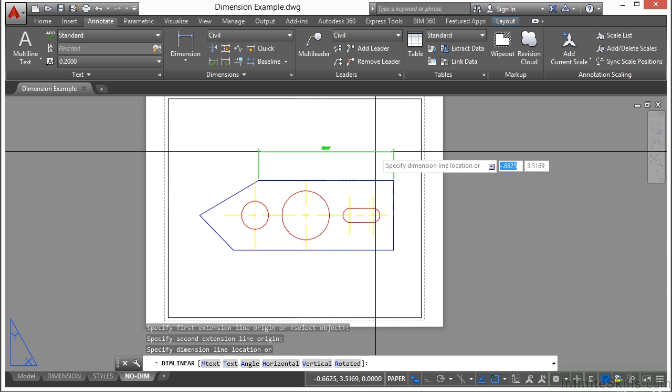So right now with it set to 2, if I draw a dimension here, any type of dimension, and then I go to select it, you see it's a dimension object. If I open up my properties palette and I select it, it tells me it's a rotated dimension. That's the type of dimension it is.

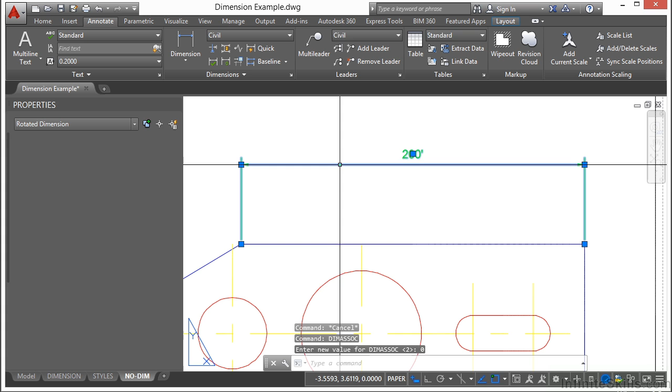Now, if I go to my DIMASSOC value and I turn it to 0, of course, this dimension will stay the same. It was already drawn in. But if I create a new dimension, I get a lot more options. This is the very old setting for dimensions that we used to use before associative dimensions. But it's still here. It's a legacy command. And when you go to use it, it asks for a lot more information, like the value.

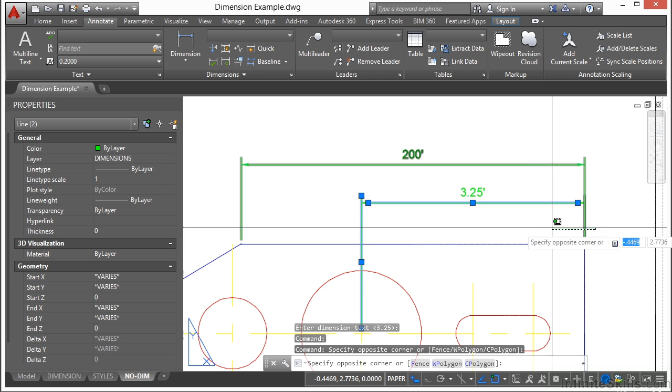Once you type it in, you can see here, this is not a dimension. This is just a series of lines. It's also a text object. And we have an arrowhead here that is really just a solid. So I can't easily change or edit it like I can here. You don't want to use this unless there's something absolutely strange about your dimension that you can't get to work right. So that's what that setting does.

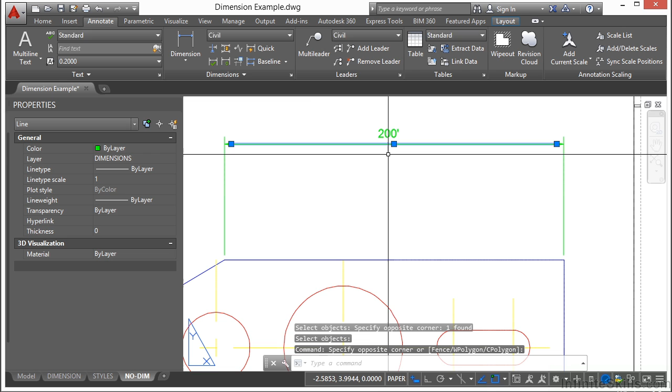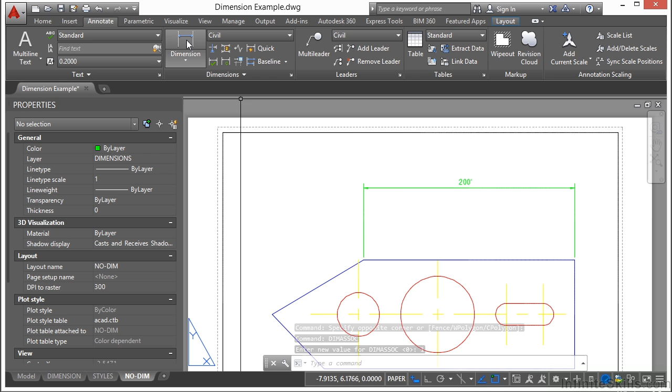Now, if you explode a dimension, that's kind of the same result. It just turns it into a bunch of lines, text, and solids. Now, there's a difference between setting 1 and setting 2. A lot of times you'll find older files set to number 1. Number 1 turns them back into a dimension object. So now when I create this dimension and select it, it's a dimension object, same as if I select the old one. I'm going to erase these to get them out of the way.

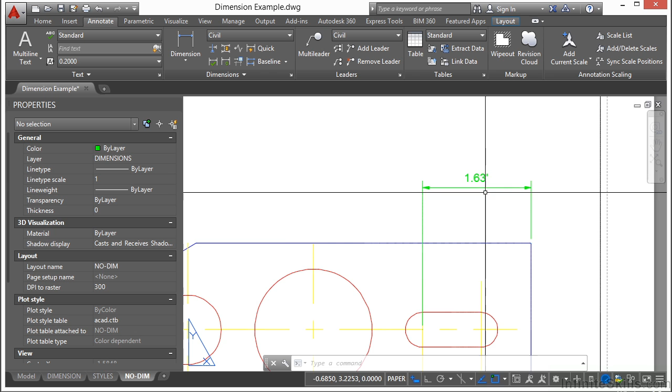But this is a setting where you need to manually set your scale. As you can see here, this dimension is 1.63 units. If I set my DIMASSOC setting to 2 and dimension the exact same spot, you'll see I'm getting a different value. Setting 2 associates your dimension insert points to the object in model space that you pick while you're dimensioning in paper space. Setting 1 doesn't do that. It takes the absolute true length of what you're actually measuring in whatever space you're in, be it model or paper space.

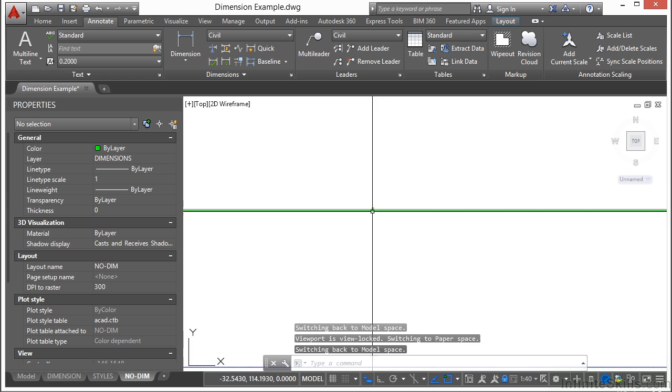So if I double click inside this viewport to activate it, change my DIMASSOC setting to 1, and dimension this, first of all, my dimension is not to scale, so it's not showing up right. But you'll see as I zoom in, I get the proper length, 65 feet. Same as in here. Setting 2 allows you to work in paper space. It measures the true distance involved, not the viewport scaling. That means you can make one dimension style regardless of the scales used.

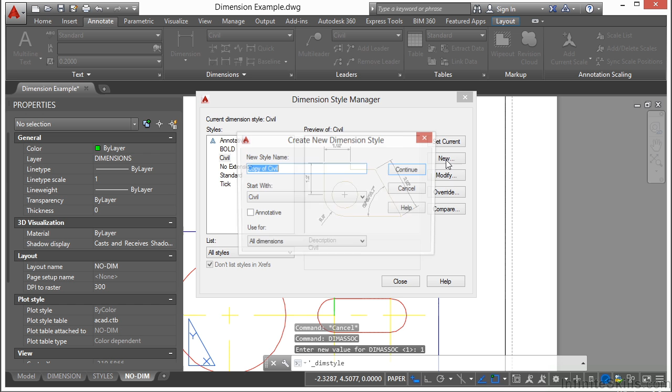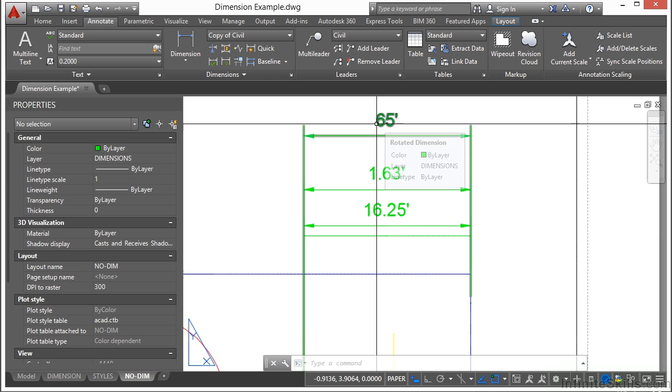So if I'm using the DIMASSOC setting of 1, in order for this to scale properly, I have to go into my Style Manager and set up the scale of my drawing right here. So if I change this, let's say to a scale factor of 10, set that one current, and make a dimension here, it scales up the value it's measuring by a factor of 10. So you can see here, this is 1 to 1, this is 1 to 10, and this is a true value based on the viewport scale.

Setting 2 is easier because if I have multiple viewports at different scales, which you will often do, especially on architectural or mechanical drawings, then I don't have to set that up. I can just go with it. Also, the setting of 2 works everywhere. It works in paper space and model space. Some people prefer to dimension in model space, some in paper space, and sometimes you may need to do both. I don't suggest that, but sometimes that happens. Setting it to 2 means there's less work for you to do.

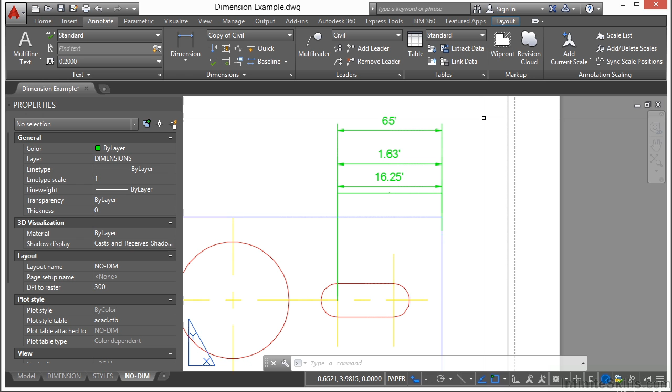The settings of 0 and 1 are legacy settings that are still there because Autodesk never gets rid of old commands or system variables. They bury them deep in there, but they keep them in, and that's the legacy thing you might come across from time to time, but just set it to 2 and everything will work fine. So if you get a drawing from somebody and it's not measuring properly when you do your dimensions, check that setting. Also check the scale factor in the dimension styles, see if that's doing something crazy, and keep an eye on that if it's not looking right.